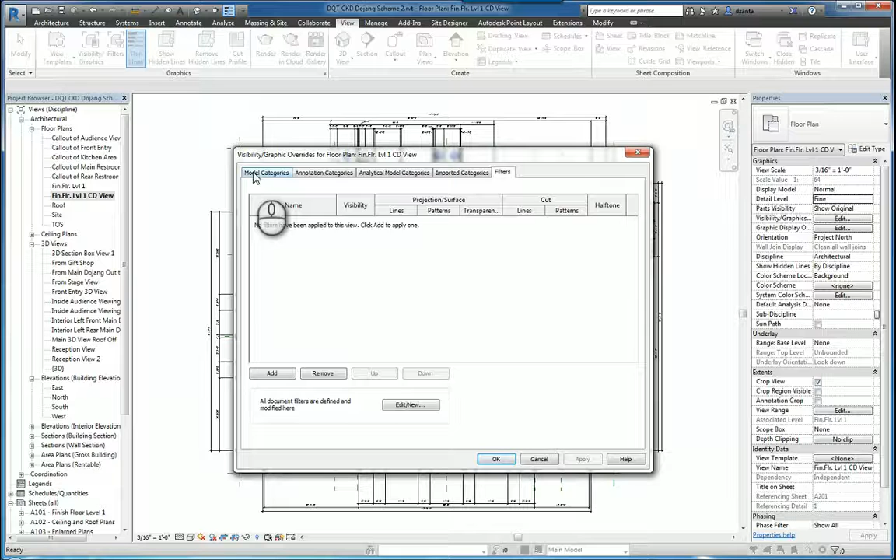Right off the bat, the way this is set up is you have Model Categories tab, Annotation Categories tab, Analytical Model Categories tab, Imported Categories tab, and Filters tab. If you have linked Revit files, you'll have a linked Revit tab as well. In the Model Categories tab, these are all the 3D model content, and I can see it because it's checked by default.

If I uncheck something, let's say for example I uncheck furniture, and I click apply and OK, you'll notice that all the furniture has disappeared. If I open up that dialog box again and turn furniture back on by putting a check mark, you'll see the data.

Each category, depending on the object and category that you're working with, you may be able to expand with this little plus symbol. And in here there are some sub-features, for example, hidden lines, ivory porcelain, so on and so forth. And this will change depending upon the category that you're looking at. For example, doors has elevation swing, framing, mullion, glass. And so you can actually change any one of the subcategories and the way they appear as well.

In the next column you have projection and surface, lines, patterns, and transparency. What it's telling you here is that any lines that you see in projection or surface can be altered. So again, for example, if it's a white cell, I can click inside and change its weight. You have 1 through 16. The higher the number, the stronger the weight.

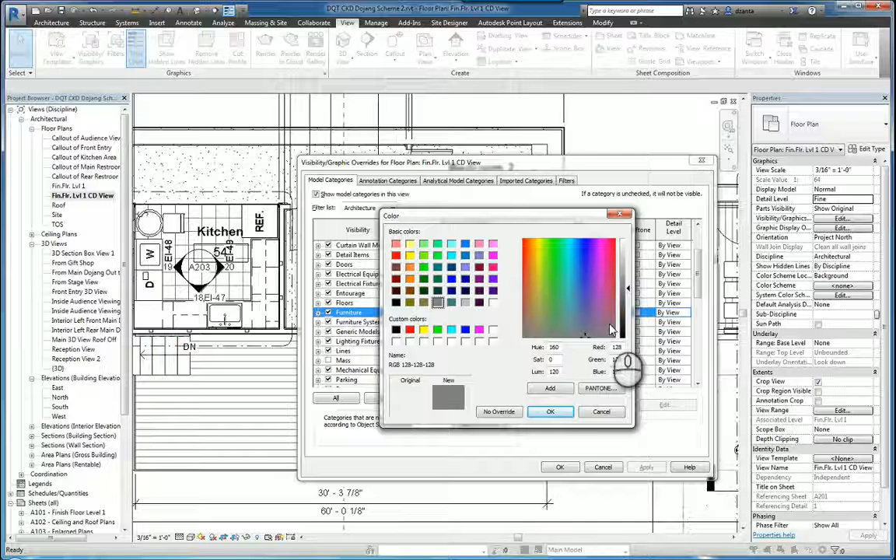You have a color, so you can pick any color you want. You can also pick custom here as well. You can also go to Pantone. So let's pick, say, this color for now. You can also specify the pattern that you want to use. And if I just do that, and I hit apply, and I hit OK, you now change the appearance of that category of objects. Let's go back to the window again.

We can also click under pattern for furniture. You can change it to a different color, change it to a different pattern. Click OK, and now you'll see it change. Let's head back. You also can set up transparency as well. So you can say 0 to 100%, meaning completely transparent. And let's say I do something like 25%. Hit OK, and now it's much lighter.

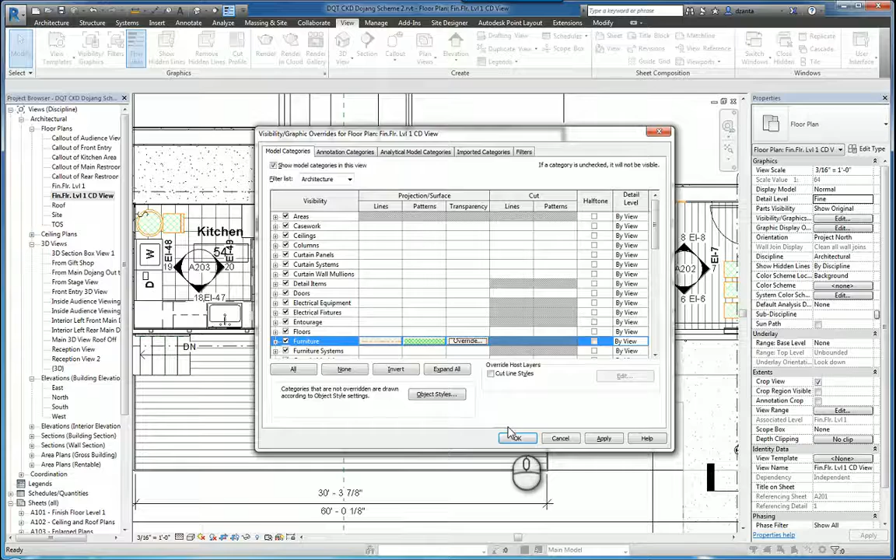And here's a good example: depending on what is behind, you may be able to see less or more, depending on the transparency value. Let's head back to that window again. And you'll also have a section called Cut. Lines that are in cut and patterns that are in cut.

What this means is that if the physical object is cut by the cut plane, then you can make adjustments to it if the cells are white. If the cells are gray like this, you cannot make any changes. So by default, furniture is a category that you cannot cut with a section cut plane. For example, if you're doing a wall section command, or a detail section command, or a building section command. You can, however, cut furniture using the section box in 3D.

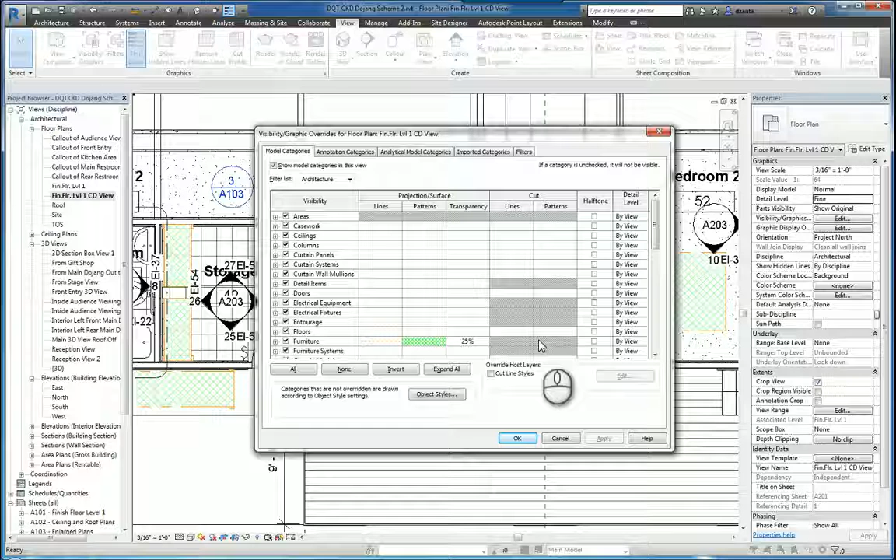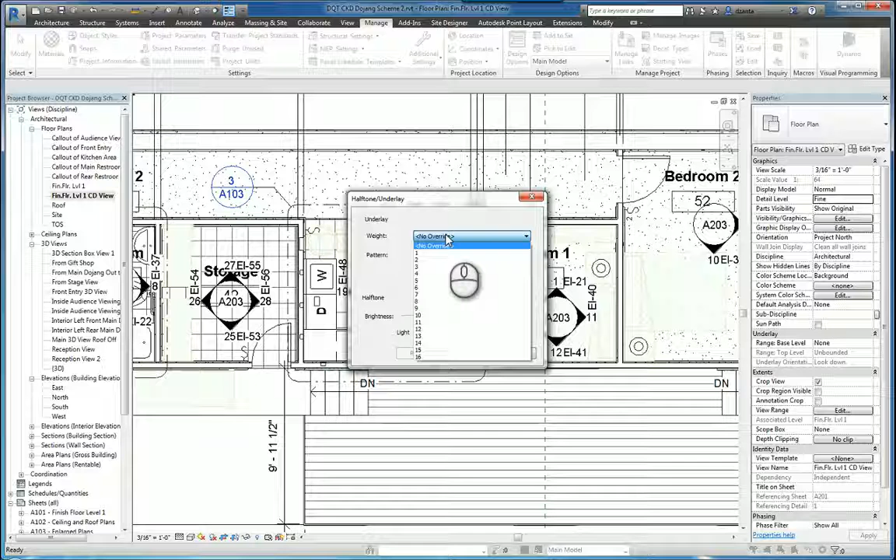Then you also have halftone, and if you click this and hit apply, everything will be much lighter. How light things appear is really based upon the Manage tab, Additional Settings, Halftone Underlay. The default is 50%, so the higher the value, the lighter it is, the lower the value, the darker it is. You can also specify an override for the weight and the pattern itself.

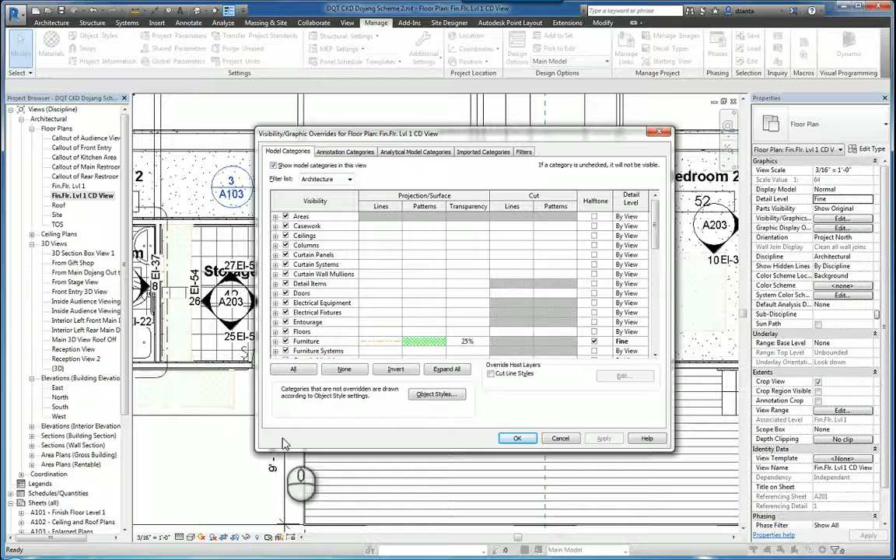And then lastly, you have detail level, so you can force this particular view for all the furniture to come in coarse, medium, or fine. Hit apply, hit OK, and those changes will take effect immediately. Now remember, this Visibility Graphics dialog box applies to individual views, and each view is controlled independently of each other.

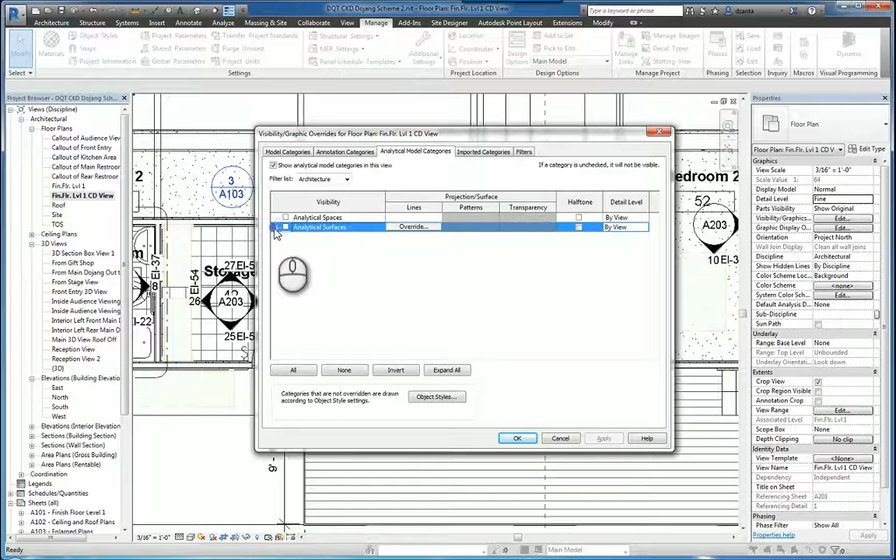You also have the Annotation Categories tab that controls the visibility and the appearance of any annotations, tags, text, leaders, dimensions, things like that. You also have Analytical Model Categories. So if you're creating a structural model, an analytical model is created by default, and you can adjust the settings here as well. If you have anything that's imported, like a CAD file, then you can also adjust any overrides of those objects.

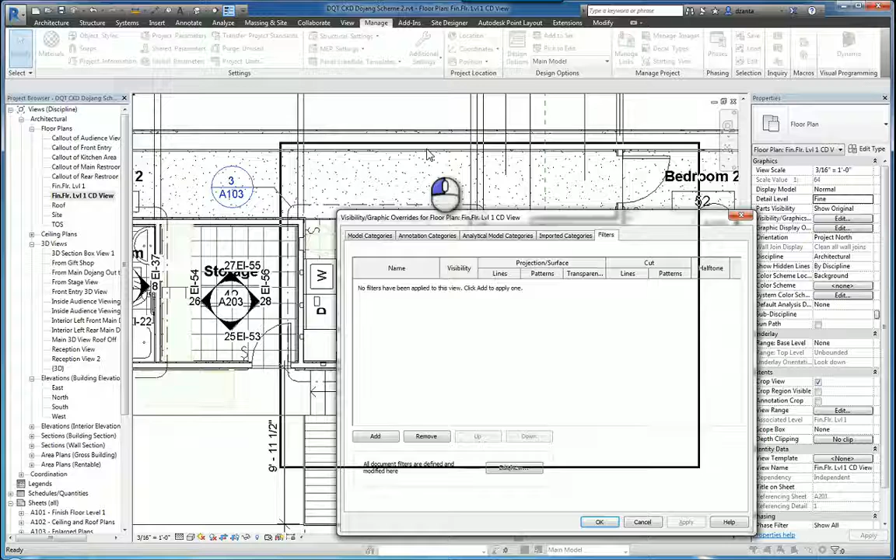And then filters allows you to tell the software to make things look and appear a certain way based upon a filtering condition. For example, walls to be colored: if they are 1 hour rated, they're a certain color. If they're 30-minute rating, they're a different color. And that's it. That's a very, very quick screencast video on the Visibility Graphics dialog box.